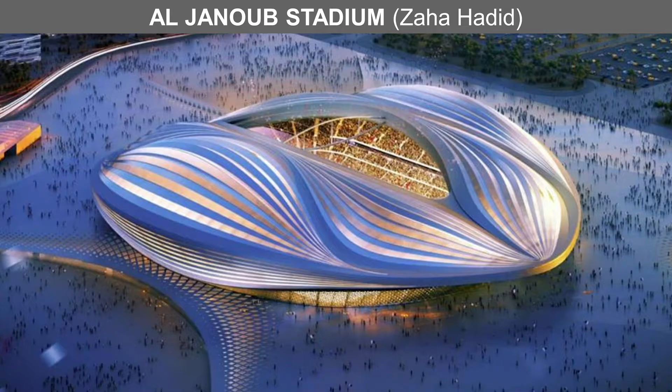Such as the recently inaugurated Al Janoub Stadium, designed by the late Zaha Hadid, which will be used for the upcoming 2022 Football World Cup in Qatar. Or another project in the Middle East, this time a 230 meters tall tower designed by the French superstar architect Jean Nouvel. Or this beautiful Mondrian hotel designed by the famous Dutch architect and designer Marcel Wanders.

So the key messages this webinar shall address are: why is acoustics important in the first place? In this introductory part, we shall discuss the fundamental benefits of acoustics. How to add value with acoustics: here, we'll capture the essence of the architectural work and look into acoustics not as a strictly technical discipline, but more as a tool which can be used to add value, both artistic and economic, to the project.

Of course, as the core business of us at Knauf Insulation is manufacturing mineral wool products, we shall address the role of mineral wool from the acoustics point of view, and we shall discuss the properties which are responsible for exceptional acoustic performance that mineral wool delivers.

Central part of the webinar will focus on the fundamentals of acoustic design and actual strategies which are utilized during the acoustic design process, and which will enable you to address any acoustic challenge you might face on your future projects. We shall also talk about the particular solutions that Knauf Insulation has in its portfolio for each particular application, and ultimately, we shall take a look into some common problems and challenges that inevitably arise during the course of the project.

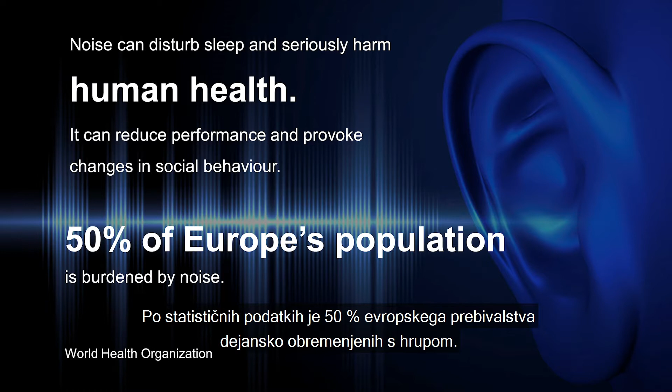According to statistical data, 50% of Europe's population is actually burdened by noise. In France, scientists went so far as to try to put a figure to the expenses provoked by various health-related problems, all triggered by noise. They came to this astonishing figure of 11.5 billion euros per year, which are lost due to employees being unable to go to work because of sleep deprivation or cardiovascular problems, all related to excessive noise and poor acoustic conditions.

And when unfortunate situations like these happen, the first place we all go are of course hospitals. Hospitals are very particular buildings which are expected to improve our health, that same health which might actually be worsened by noise. And now we can easily find ourselves caught with a very difficult problem: that noise-related issues are expected to be solved in institutions such as hospitals, which themselves could easily have problems with poor acoustics.

That is actually quite a common situation in hospital buildings worldwide. Here's a strong statement from the UK Department of Health on how important good acoustic design in hospitals is: good acoustic conditions improve patient privacy, dignity, and promote essential sleep patterns. Such conditions are key to healing.

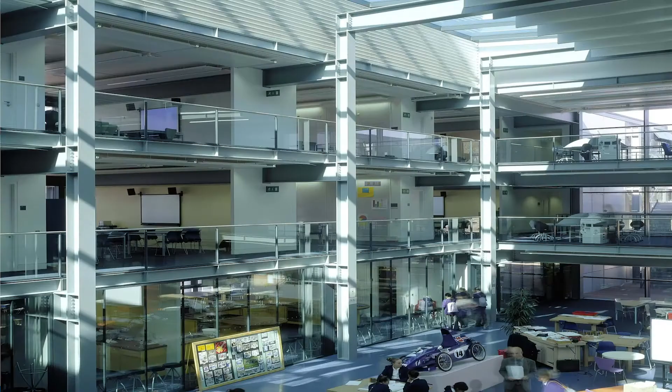In order to foster the open space approach and collaboration and communication between spaces, classrooms were designed without back walls, as you can notice in the image. By doing so, by removing the back walls, the classrooms were connected to this large interior atrium.

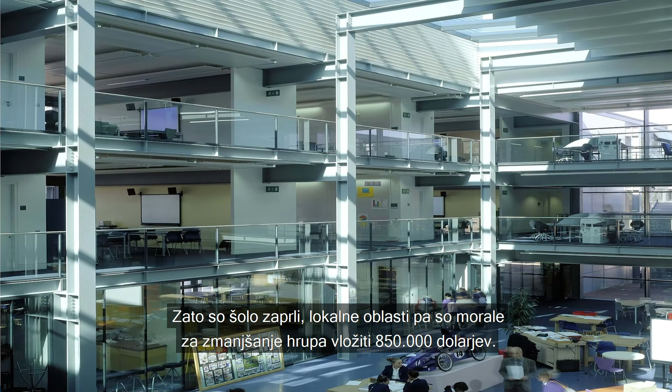So what actually happened on the very first day of school? The noise between the classrooms resonated so much through the atrium that students were not able to hear the lecture. And the outcome? The school had to be closed, and the local authority had to invest $850,000 on noise mitigating solutions.

These noise mitigating solutions were actually panes of glass that were installed at the classrooms' back walls. So today the classroom and the school look like this. All the classrooms are now enclosed, and that original idea of having open and connected spaces was actually abandoned.

So this is a very good example of how an idea which might sound really good at the early stages of a project can easily turn out to be very problematic from an acoustics point of view.

In the end, to summarize this introductory part of the webinar, we have mentioned a variety of positive aspects of acoustics which go beyond compliance with acoustic regulations. These include health aspects, comfort, functionality of the space, impact on productivity, as well as increase in profitability.

We also saw that acoustic design can be used as a powerful tool to increase the value of the property, and as a design feature which we can incorporate within the fabric of the architectural design. As a final thought, good acoustic design is important everywhere.

It's not only a privilege of opera halls, but it's also a very important aspect of residential buildings, schools, or even restaurants. Now that we know acoustics is important, let's take a look at the product we at Knauf Insulation are manufacturing, the mineral wool. This part of the webinar shall address the role of mineral wool from the acoustics perspective.

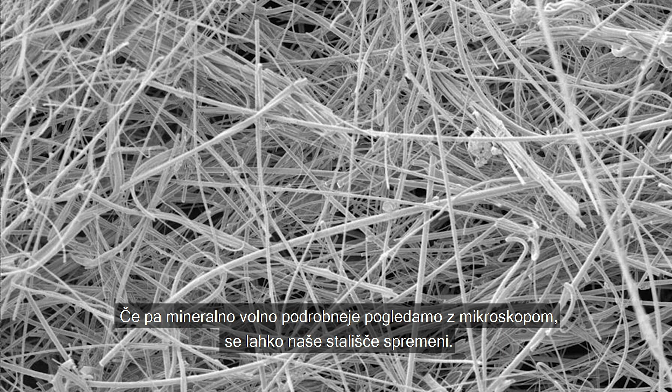However, let's take a closer look with the microscope, and we might find our perspective will change. So here's how the mineral wool looks under the microscope. To give you an idea of the scale, the diameter of these fibers is around 5 to 10 micrometers.

With this image in mind, we can already intuitively understand that sound will have a difficult task passing through this network of pores. While the sound is doing its best to move through this dense network of pores, a certain physical phenomenon happens, which we call the loss of acoustic energy.

This loss of acoustic energy is governed by many parameters, but the most important ones are fiber orientation, fiber size, the density of the entire insulation package, and of course the chemical composition. So something that didn't look so spectacular at first glance is actually a very sophisticated product with a lot of room for optimization of its performance.

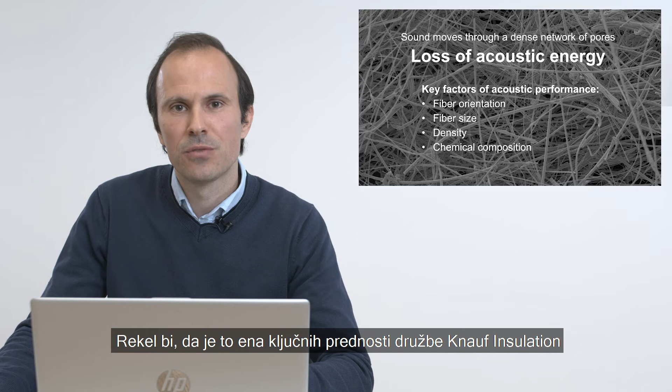You can easily imagine that acoustic properties will change if our fibers are thicker or thinner, or if the fibers are parallel or perpendicular to the sound. These are all parameters that our experts, scientists and acousticians at Knauf Insulation investigate with great attention. We do our best to optimize these parameters into a final insulation package suited for a particular application, and I'd say this is one of our key strengths at Knauf Insulation.

Our knowledge, our experience and our expertise, and the amount of effort we invest into the research and development of mineral wool, from the raw material, through the production line, to the final product which is packed and eventually delivered to you at the construction site.

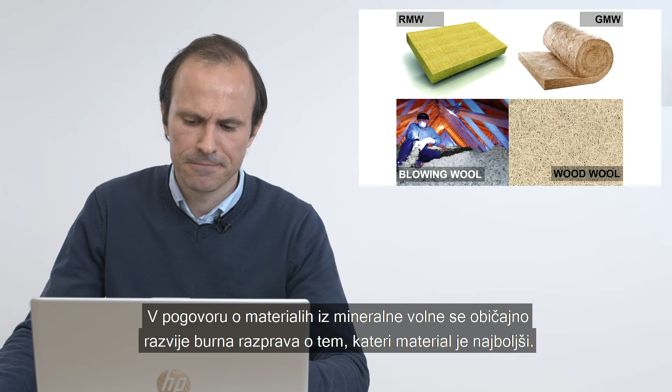When mineral wool materials are discussed, there is usually a strong debate around which material is the best. Is it wood wool? Is it glass mineral wool? Rock mineral wool? What I always like to point out and emphasize is that each of these materials has its own strong points, so it's up to the particular application to define which material will be best.

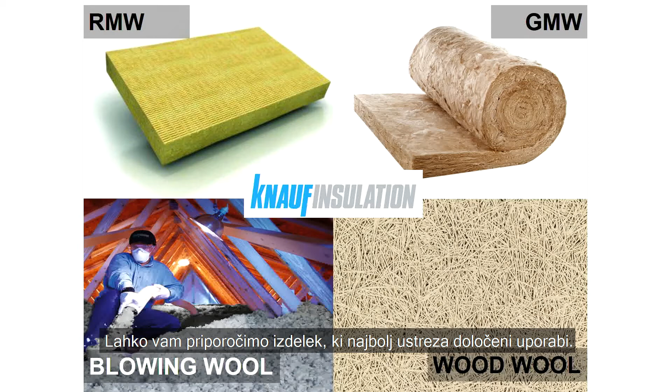That's again one of the strong points for us at Knauf Insulation, because we manufacture all these mineral wool products: blowing wool, wood wool, rock mineral wool, and glass mineral wool. So we are able to recommend a product which actually suits a certain application the best.

So what actually happens with the sound when it hits the surface of the mineral wool? Part of the incoming sound is reflected back to the space where it originally came from. Part of the sound is absorbed within the material, within that complex network of pores we saw, and the part which finds its way through the structure to the other side we call the transmitted sound.

These are the three main components which govern the acoustic performance of materials. The ratios and magnitudes of reflected, absorbed, and transmitted sound determine the material's acoustic properties and basically the possible use of a certain material for acoustic purposes.

Because of the porous structure of mineral wool, we say that the principal parameter of its acoustic performance is sound absorption. So what is sound absorption? There are a lot of mind-twisting definitions for sound absorption, and a lot of theoretical expressions to define it.

But I find a very convenient way to describe this property by looking at two opposite acoustical properties: sound reflection and sound absorption. Very intuitively, without deep theoretical knowledge, we can easily differentiate between materials which are more acoustically reflective and which are more acoustically absorptive.

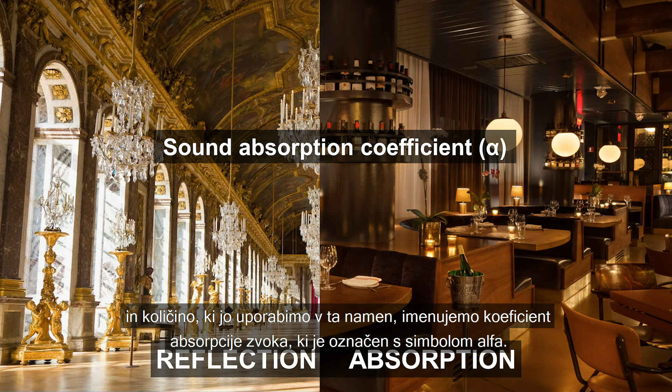And this ratio of reflected and absorbed sound is what we actually measure, and the quantity which we use for that purpose is called sound absorption coefficient. We indicate the sound absorption coefficient with the symbol alpha. As with every coefficient, this alpha can range only between 0 and 1. So for very reflective materials, we will have a sound absorption coefficient of 0, or a maximum value of 1 for very sound absorptive materials.

Typically, we like to say that the higher alpha value means the better acoustic performance. That is true, but we also saw that there are fine limits to what optimum acoustic performance means for different types of spaces. So yes, the higher alpha indeed means better acoustic performance, but the optimum value required will depend on the reasons behind the acoustic design.

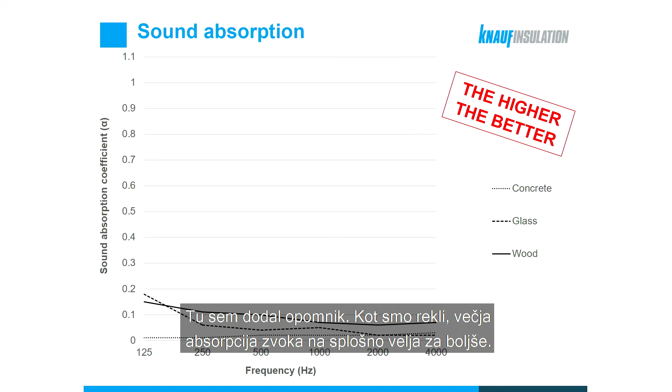Now we can take a look at some actual building materials and understand how to interpret a typical sound absorption chart. As a reminder, higher sound absorption is generally considered better. These are the results of standard sound absorption tests for three materials: concrete, glass, and wood. Before we go into the details, we do see that the values are rather low and closer to 0 than to 1. This is immediately indicative that this group of materials has low sound absorption.

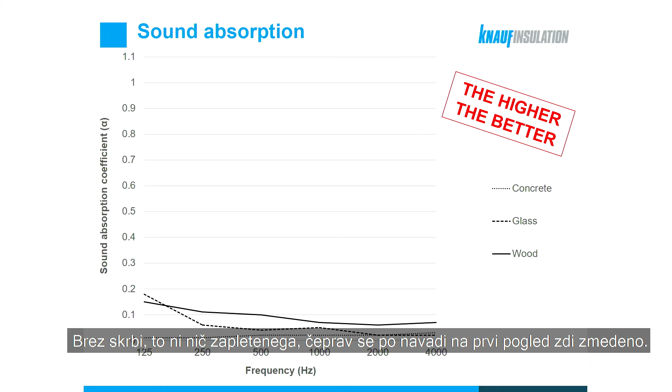On the left side of the chart is the sound absorption coefficient, ranging from 0 to 1. On the horizontal axis is the frequency range, so don't worry, this is nothing complicated, although it usually looks very confusing at first sight. To make things easier for everyone, we have developed a system to express the acoustic performance of materials as a single number.

That's very convenient, and makes our lives and coordination on projects much easier. However, sound is a phenomenon which occurs across a wide range of frequencies, and that's the reason why all acoustic tests are done on a large frequency range. In our example, we can notice relatively low sound absorption across the entire frequency range. Now, if we average these values using the single number convention, we could say that these three materials - concrete, glass, and wood - have a sound absorption coefficient, or alpha, of around 0.1.

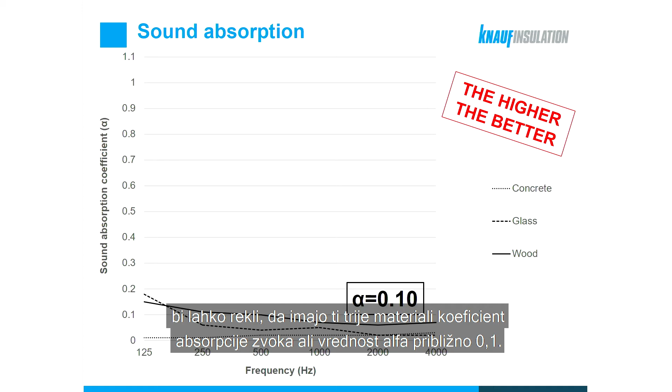Let's now add some materials to our chart - materials which we usually consider soft or acoustically absorptive. These are leather-covered seats, carpet, and heavy velour drapes.

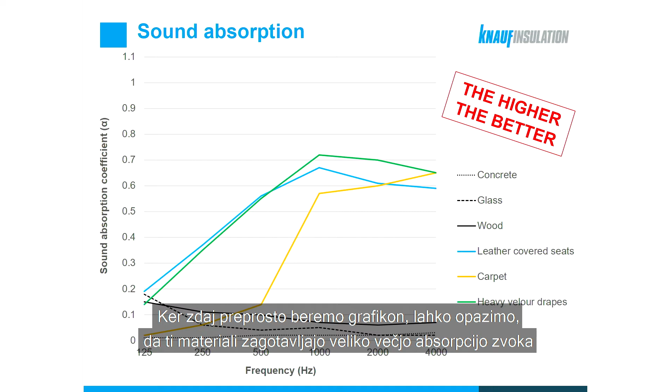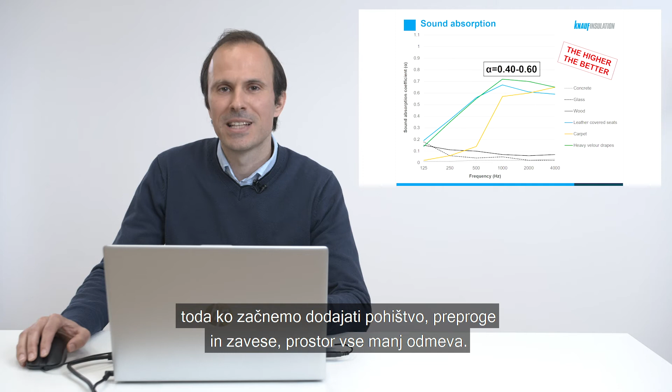Now that we can easily read the chart, we notice these materials provide much higher sound absorption, and using the single number convention, we can say these materials have a sound absorption coefficient alpha between 0.4 and 0.6. You can already imagine a simple example: an empty room which sounds very echoic, very reverberant. But as we add furniture, carpet and curtains, the room becomes less and less echoic. In a certain way, this is a real-life representation of this chart.

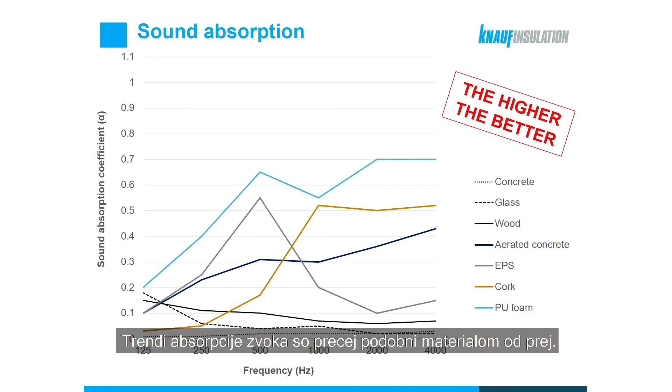Now, instead of these common materials used for interior decoration, let's look at some proper building materials such as aerated concrete, EPS, cork, or PU foam. The trends of sound absorption for these materials are very similar to the materials from before, and again we're talking about a range of sound absorption between 0.3 and 0.6.

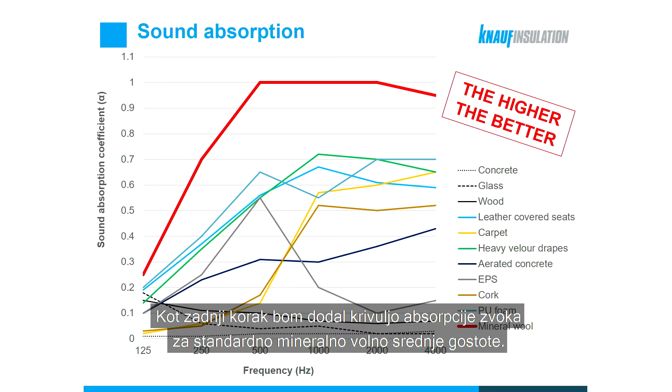Now, to make things very complicated, I'm going to add all these graphs to the same chart. And in the last step, I'll add the sound absorption curve for a standard mineral wool having medium density. Thanks to the open pore structure, it's evident that mineral wool has superior sound absorptive performance compared to these other materials, because those have a more closed structure of pores. Now we're reaching an alpha value, a sound absorption value, of around 0.9 to 1.

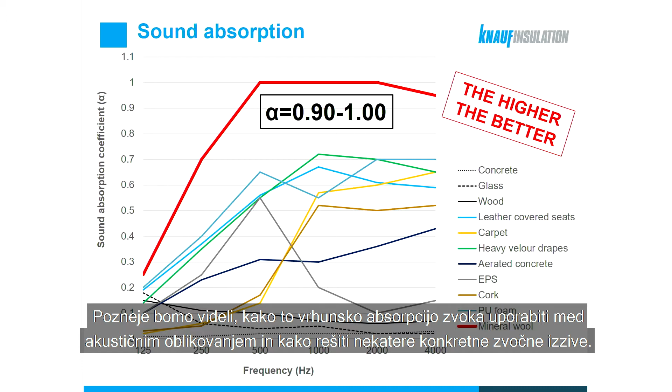Later on, we shall see how to utilize this superior sound absorption in acoustic design to solve some actual acoustic challenges. Just a note: all of these charts correspond to materials of similar thickness, around 30 to 50 millimeters, so the comparison of sound absorption between these materials makes sense in the first place.

Here are the key messages of this part of the webinar related to the role of mineral wool. Earlier, we saw the microstructure of mineral wool and the dense network of pores, which is actually responsible for its acoustic performance. We also mentioned several types of mineral wool: rock mineral wool, glass mineral wool, wood wool, and blowing wool. And we said that there is no single best product or best technology for all purposes.

The best product and the best technology will be determined by the specific requirement or application of interest, and we at Knauf Insulation manufacture all these types of insulation. Finally, we saw the excellent sound absorption properties that mineral wool has, and the advantage of an open cell structure compared to a closed cell structure.

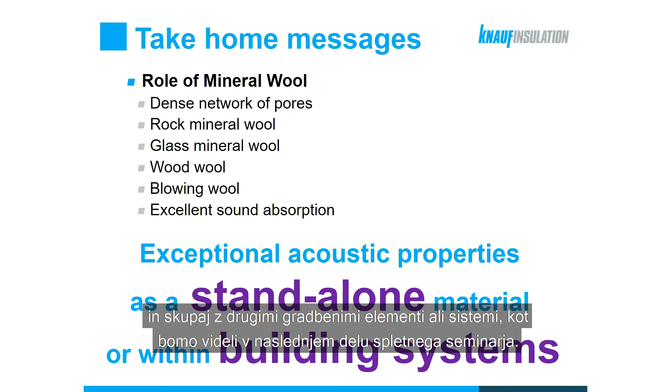In the end, we can say that mineral wool as a material has a very important role in acoustic design, both as a standalone material as well as within building elements or systems, as we are going to see in the next part of the webinar.

And here we are. After this initial, introductory part of the webinar, we are coming to the central part where we are going to talk about the fundamentals of acoustic design and the strategies on how to include acoustics in architectural design.

There are 5 fundamental aspects of acoustic design. For every single project in the world, no matter its type, size, or location, there are these 5 aspects we have to consider in order to address the entire acoustic design of a certain project. We can use this image of a very simple object to illustrate all 5 aspects.

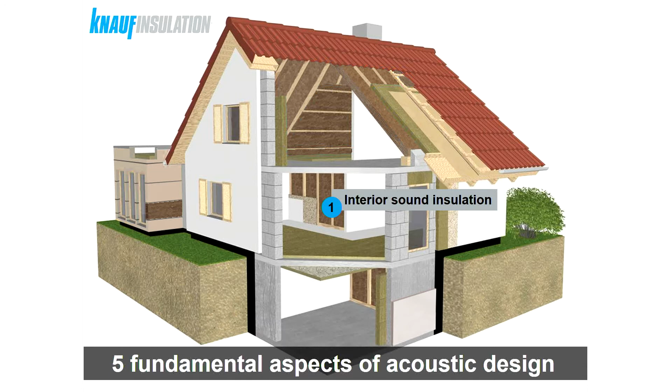The first fundamental aspect of acoustic design is maybe the one everyone is most familiar with: sound insulation between the interior spaces of the building itself. The second is room acoustics, which refers to the quality of sound within the space, similar to the acoustic ambient in the restaurant examples we discussed before.

The third is insulation from outdoor noise, basically the design of the building envelope to provide sufficient insulation from outdoor noise.

The next aspect is the noise of building services heard inside the building—typically air conditioning systems, ventilation systems, plumbing, elevators, and various items of equipment essential for the operation of the building. The last one is the impact from our building towards the environment.

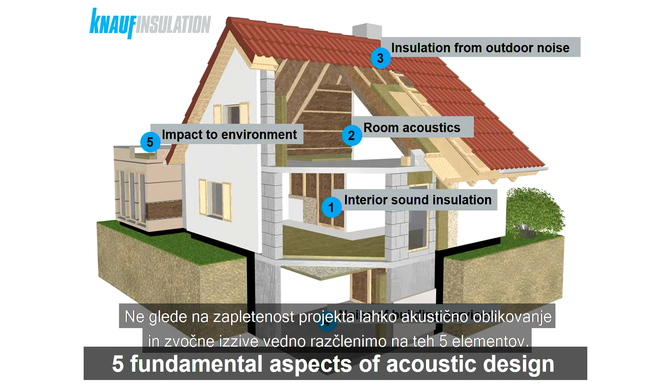This aspect deals with the acoustic treatment of equipment installed within our buildings, typically on the roofs. So no matter how complicated the project might seem, the acoustic design and challenges can always be broken down into these 5 fundamental aspects.

Let us start with the first fundamental aspect of acoustic design, the one that is maybe closest to everyone, that people usually have in mind when we talk about acoustics: interior sound insulation.

At the beginning, it's very important to define 2 principal mechanisms of sound propagation: airborne sound and impact sound. Airborne sound is the sound which travels through the air, such as the sound we hear when someone is singing or listening to the television.

On the other hand, there is impact sound, which travels through the structure—that would be the sound we hear when someone is walking on the floor above us.

When we talk about airborne sound and the ways to protect ourselves from it, to isolate ourselves from it, we use the term airborne sound insulation, denoted Rw. The higher this Rw is, the better it is.

To give you an idea what this means, we shall illustrate the subjective impression of privacy for some basic constructions. Let's imagine the person on one side of the wall is talking and we are listening on the other side, and the wall between us has a certain RW rating, a certain airborne sound insulation rating.

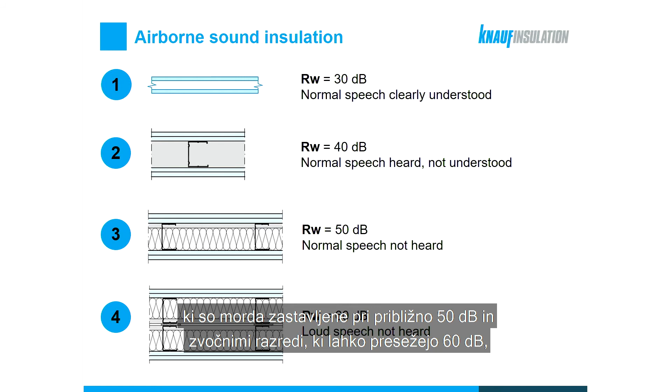However, this does not mean we will not hear the neighbors if they talk a bit louder or decide to play some music. So we would have to go further up, let's say to 60 decibels, to make a loud speech not heard. A wall construction providing 60 decibels could be, for example, a drywall with a double stud construction. You can see there are very fine limits between these ratings, and all of this is actually subjective, so it's not easy to make everyone happy all the time. This is exactly the difference between acoustic regulations, which stand around 50 decibels, and acoustic classes, which could go even above 60 for a luxurious acoustic class.

So to remind ourselves, the higher the airborne sound insulation, the better it is. The principal design strategy when we talk about airborne sound is the careful selection of constructions which have high airborne sound insulation. With impact sound, the situation is slightly different. Acoustic regulations will generally regulate the level of the impact sound. So just be careful: not impact sound insulation, but just impact sound. And for impact sound, the lower the value, the better it is.

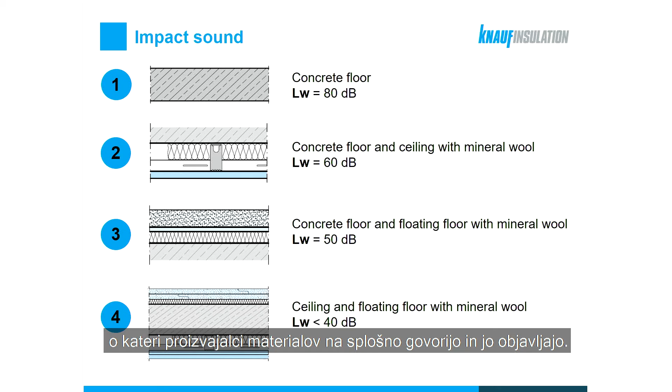So although it's the impact sound which is generally regulated, and we target the lowest possible figure for impact sound, it's actually another quantity which material manufacturers generally talk about and publish: the delta L value, which is the reduction of the impact sound. This is nothing more than the difference in impact sound between the concrete floor and the same concrete floor upgraded with a certain solution. For example, our floating floor has a delta L value of 30 decibels, and our ceiling solution has a delta value of 20 decibels. In this case, the higher the delta value, the better it is.

So impact sound and reduction in impact sound are two very similar things which usually cause a lot of confusion in the design. But what's very important to remember is: the lower the impact sound, the better it is; the higher the reduction in impact sound, the better. The principal design strategy will include selecting separating constructions of floors and ceilings having a high reduction in impact sound. When we talk about basic wall constructions where mineral wool is utilized, we generally have in mind these wall types.

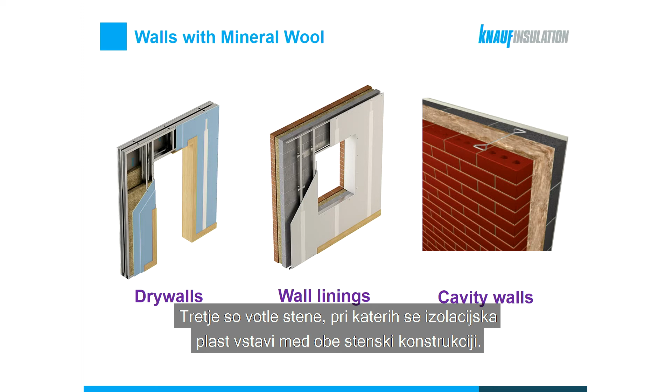But what is most interesting for us are the actual acoustic effects of mineral wool, the improvements that mineral wool brings to these constructions. One of the most often asked questions we face is about the actual difference in sound insulation of a certain construction with and without mineral wool. So let's address exactly that problem, and for the start, let's look into the effects that mineral wool has in classical drywall systems.

For example, the part of this wall on the image has a mineral wool layer in the air cavity, and a small part has nothing between the steel elements. So the very legitimate question we can pose is: what is the difference in sound insulation between such two constructions?

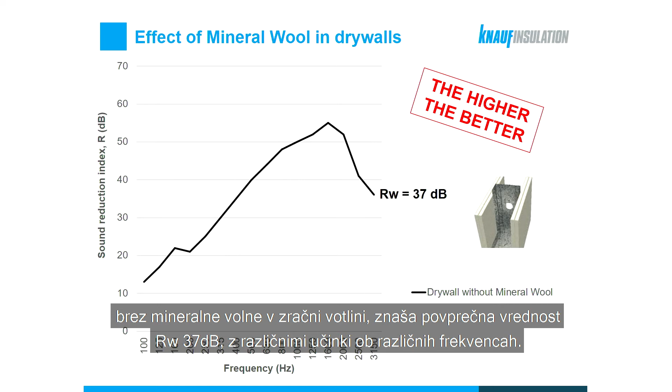Here is the Airborne Sound Insulation graph, with a reminder that the higher sound insulation value, or the higher RW value, means the more favorable acoustic result, or actually the better privacy between two spaces. So for this standard 100 mm dry wall, which has two standard 12.5 mm thick gypsum boards on each side of the wall and no mineral wool in the cavity, we expect an average value of RW of 37 decibels, with different performance across different frequencies.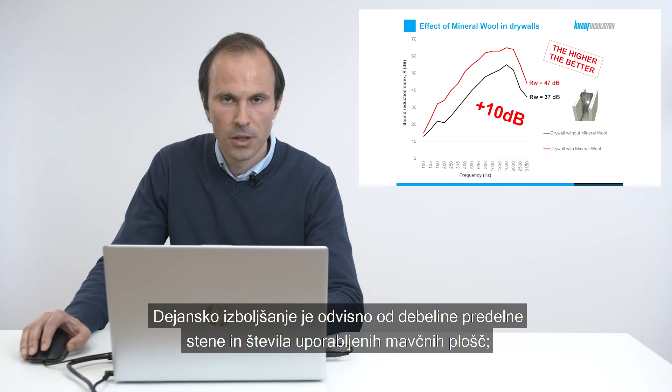But please have in mind that this 10 dB increase is not a fixed value that is valid for every single wall structure. The actual improvement will depend on the thickness of the partition or the number of gypsum boards utilized. But generally, yes, there will always be an increase in the airborne sound insulation with adding the mineral wool.

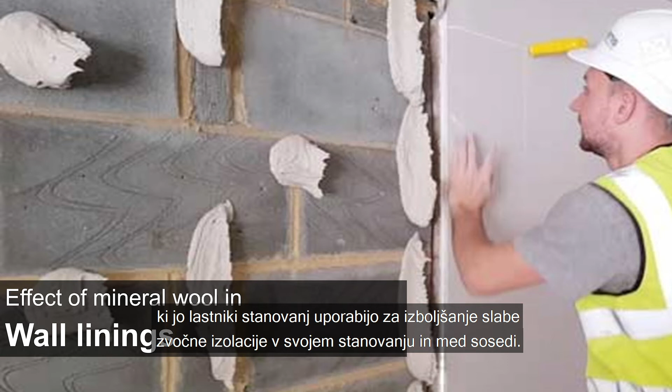When we talk about sound insulation, wall linings are also a very interesting subject, because this is the strategy which homeowners utilize to increase the poor sound insulation between themselves and noisy neighbors. And what we see as a very common technique is a direct fixation of the gypsum board to the main wall, as given in the image, without any insulating layer.

So let us then compare the sound insulation for two wall upgrades. First one, done without insulation, so with a direct adhesion of the gypsum board to the basic wall, achieves an RW value of 53 decibels. And the other solution, which includes a mineral wool layer between the same basic wall and the gypsum board, achieves 61 decibels. So the benefit of utilizing mineral wool is quite evident in the entire frequency range, and finally brings an additional 8 dB increase in sound insulation.

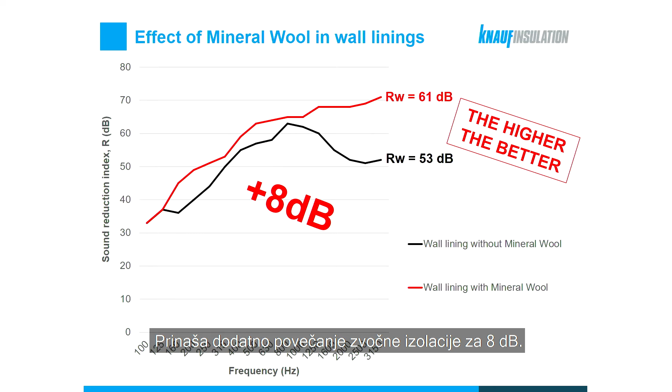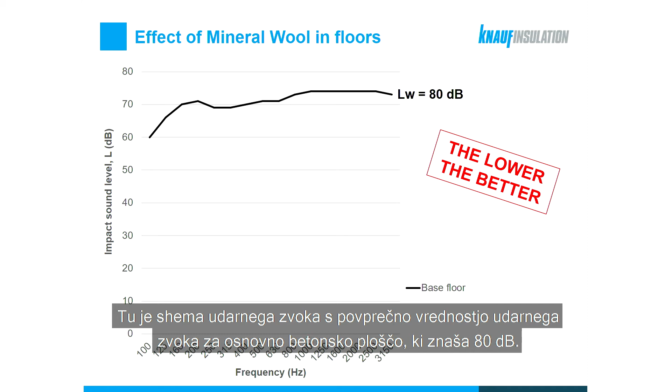Now let's move from the walls to the floors. We shall do the comparison against the basic floor structure, and in our case it's a simple 140 mm thick concrete floor. We shall compare acoustic performance, the impact sound insulation in this example, with the same floor construction, which has a few additional layers: an insulating layer of 30 mm Knauf insulation mineral wool, and the floor finish, which can be cement screed, parquet, or just ceramic tiles. Here is how the impact sound insulation chart looks, with the average value of impact sound for the basic concrete slab amounting to 80 dB.

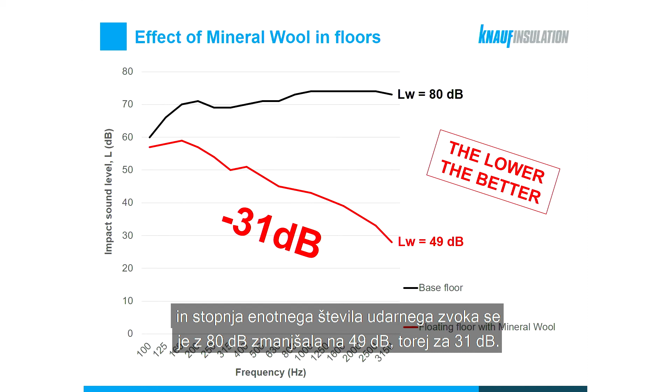Please remember that this chart displays the impact sound, so not sound insulation. Therefore, as we said, the lower the value, the better it is. Here's what happened with the impact sound when we add the floating floor with mineral wool on top of that basic concrete floor. The reduction of the impact noise is evident across the entire frequency range, and the single number rating of impact sound has been reduced from 80 to 49 decibels, so a 31 dB reduction in impact sound.

A 45 mm Knauf insulation mineral wool is added below the basic 140 mm concrete floor, and the ceiling is closed with a single board of standard 12.5 mm gypsum.

And here is the comparison of impact sound level for these two constructions, before and after the installation of the ceiling with the mineral wool. There is a 23 decibel reduction in impact sound, from 81 decibels for a basic concrete floor down to 58 decibels for a concrete floor with the suspended ceiling. So a delta L value of 23 decibels.

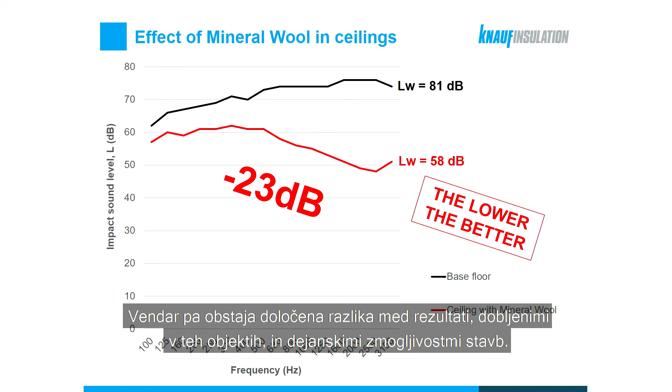So all these examples that we have just seen come from actual acoustic tests undertaken in standardized acoustic facilities, basically in acoustic laboratories. However, there is a difference between the results obtained in these facilities and the real-life performance in buildings.

This difference in acoustic performance between the acoustic laboratory and the construction site is often the cause of problems and disappointment with poor acoustic insulation from the homeowner's side.

This is a very complex subject, but to simplify it, I like to use the analogy of fuel consumption, because fuel consumption is something much closer to our hearts and our pockets, and all of us visit petrol stations much more often than acoustic laboratories.

So how does fuel consumption work? When we buy the car, the manufacturer declares an average fuel consumption, and this consumption has been very precisely measured following a very strict test methodology. This declared fuel consumption corresponds to acoustic performance measured in the laboratory, with indicators for airborne or impact sound insulation, on the right side of our fuel indicator.

Let's say when we have a full tank - we call this the nominal acoustic performance.

On the other hand, we bought the car, now we're starting to drive it, and we immediately notice that we consume more petrol than declared by the manufacturer. In the real world, this is something we all accept as more or less normal, and we do not take the manufacturer to court because of that. We understand that the standard fuel consumption test assumes constant speed, while we usually drive a bit slower or faster. That's actually what happens with acoustic performance at the construction site.

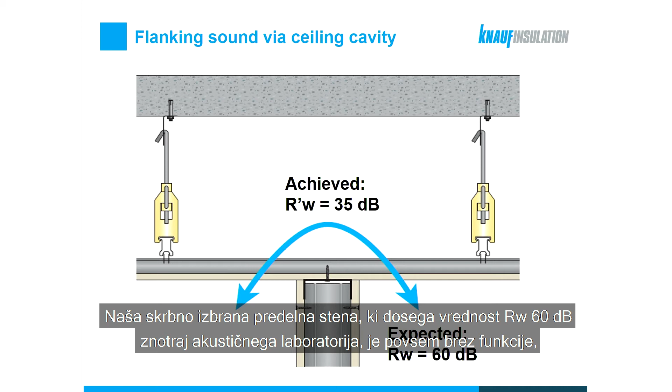Because all the sound goes above the partition, through the lightweight ceiling, or actually maybe even a perforated ceiling, the sound reaches the other room with an actual R-W of 35 decibels. So we have a 25 decibel lower acoustic performance than we expected. A disaster. And there are no limits to the possibilities for flanking sound transmission.

Flanking sound can also happen because of the penetration of services. In this particular case, the architect was actually very knowledgeable, and extended the partition above the ceiling level to overcome that first problem.

But the team in charge of running these services above the ceiling level was not on the same page, and to make their lives easier, they opened a considerable part of the wall to install the services. Again, the nominal sound insulating performance was degraded and the level of privacy was not satisfactory for the end user. Sometimes such problems occur just because of an internet cable which had to be additionally installed. So a small cable, a big hole, and a big acoustic problem.

You can imagine the disappointment of these people when they realized their internet was now much faster, but the level of privacy was seriously degraded. Details of construction, which might seem of low importance, can also play a big part in the story of acoustic design.

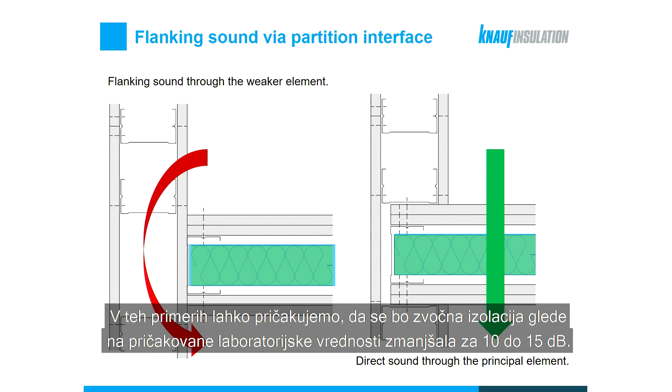Although these walls have been selected with an insulating layer and an extra gypsum board to provide a good level of sound insulation, in real life we will again face problems because the sound will go around the partition, not through it. We will again face degradation of the nominal acoustic performance. In such an example, we could expect a 10 to 15 dB reduction in sound insulation from the expected laboratory value, compared to an example where there is no degradation because the principal wall element was not interrupted. We could go on with similar cases from practice, but for the moment let's close this chapter and repeat the important messages.

There are two principal mechanisms of sound transfer and sound insulation: airborne sound and impact sound. Mineral wool is an important part of building elements whenever acoustic performance is important. We should be very careful when detailing our design about the traps that flanking sound transmission can bring. And most important of all, which we have illustrated in several examples, is that mineral wool increases the sound insulating performance of building elements. So there is an actual difference in sound insulation with solutions with and without mineral wool.

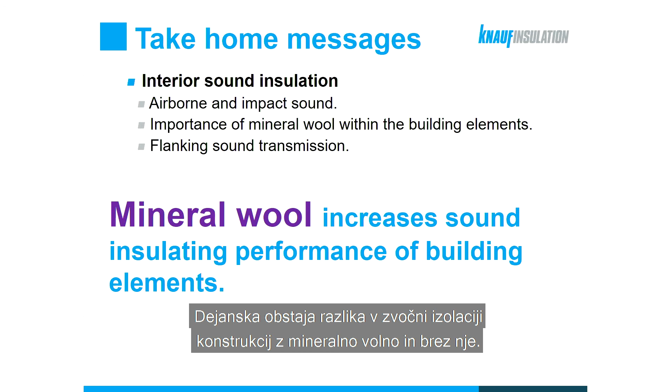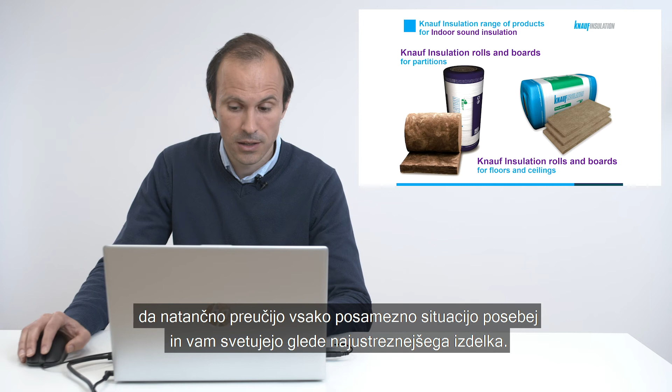The range of Knauf Insulation products suitable for indoor sound applications includes Knauf Insulation rolls and boards for partitions, as well as rolls and boards for floors and ceilings. I emphasize that our technical teams at Knauf Insulation are always at your disposal to carefully study each particular situation separately and advise you on the most suitable product for your particular project.

The second part of the webinar is in a certain way different from the previous one. That first aspect focused on isolation from unwanted sound. But in this part, we shall focus on room acoustics, so on the quality of sound within the space. To define what we mean by the quality of sound, first we need to understand what happens with sound within a space.

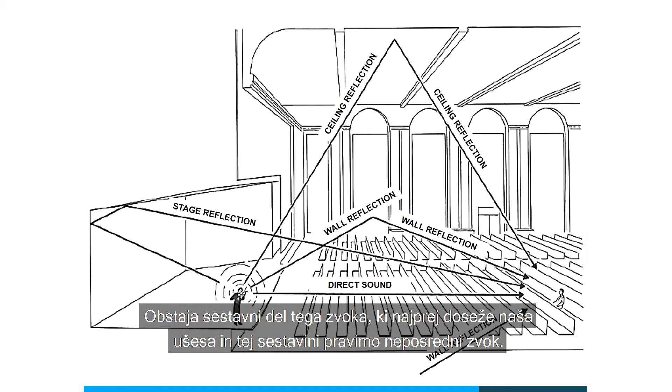What happens with sound when someone says a word or plays a note on the violin? When a violin player plays a tone, sound travels in every possible direction—forwards, backwards, up and down. There is a component of this sound which comes to our ears first, and this is called the direct sound. This is the sound which traveled the shortest possible distance from the source, from the violin in our case, to the listener, without any interaction with other surfaces.

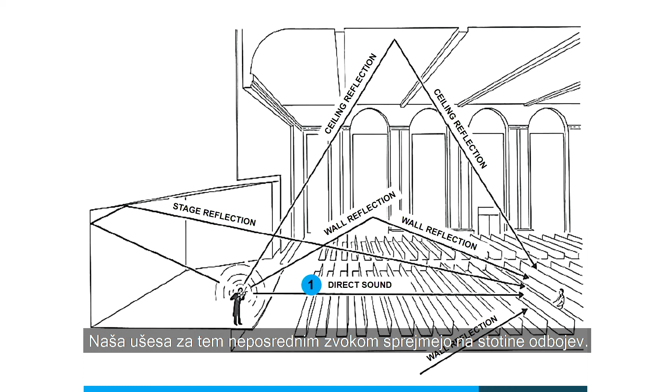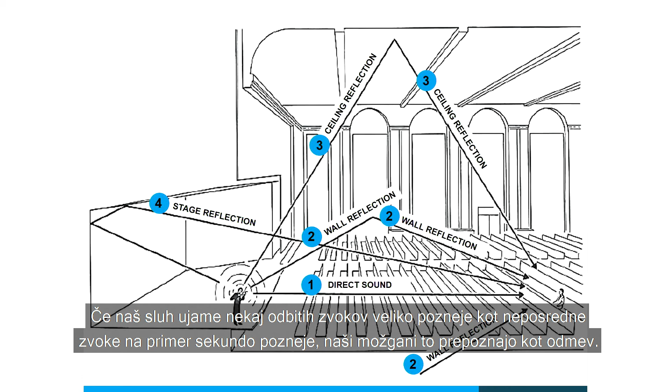In a very rapid succession after this direct sound, our ears receive hundreds of reflections—some from the walls, some from the ceiling and the stage, some from the floor and the seats. The synchronization of all these components defines the quality of the sound that we perceive as listeners. If our ears catch some reflected sounds much later than the direct sound, for example 1 second later, our brain will recognize this as echo. But if these reflected sounds arrive very quickly after the direct sound, within a few milliseconds, our brain will have trouble recognizing what was the direct sound and what was the reflected sound.

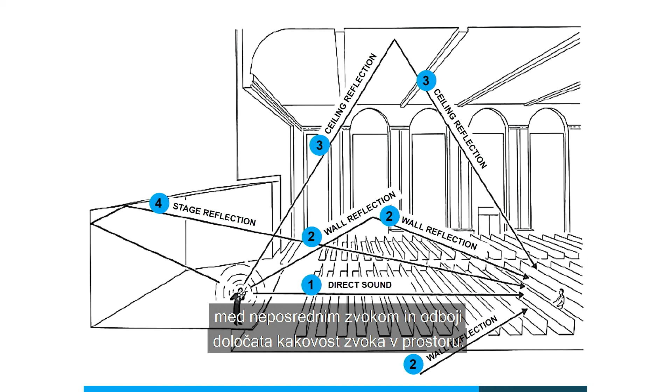Our brain will recognize it as a very rich sound and appreciate this very strong acoustic sensation. So very generally, we can say that this permanence of sound within the space, and this very fine balance between the direct sound and the reflected sound, defines the quality of sound within a space. This permanence of sound within the space is what we call the reverberation time, measured in seconds, and it's usually considered one of the main parameters which defines the acoustic quality of a certain space.

Now, a very good question is, what is the best, what's the optimum reverberation time for a certain space? Well, I have to disappoint you, there is no straightforward answer to this question. There are certain types of spaces where short reverberation time is preferred.

So when I say short, I mean reverberation time below 1 second. These are typically spaces such as offices, meeting rooms or classrooms, where it is the spoken content which is predominant, so our main intention is to make the spoken content understandable. On the other hand, in spaces where music is of importance, we benefit from a longer reverberation time, usually exceeding 1 second. Opera lovers, for example, will appreciate a reverberation time of 1.5 seconds, and it is said that Mozart might sound best with a reverberation time of 2 seconds or more. So you can see there is a very fine and fragile limit between these values.

Actually, that's the beauty of acoustics, because there is no strict rule for what is good and what is bad. But our general idea and our target is to make the speech intelligible and to make the music strong and clear. And we use reverberation time as the convenient way to express and quantify that.

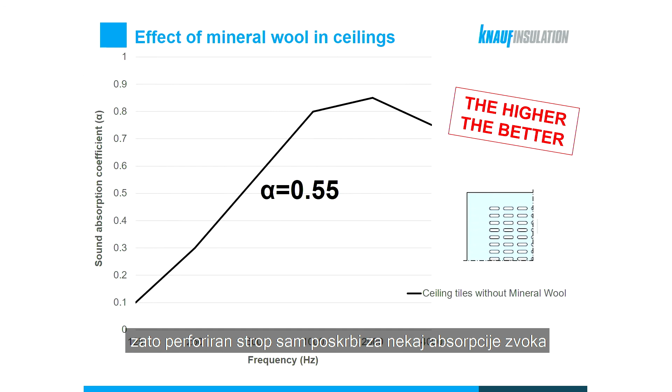This again is the sound absorption chart for a classical perforated ceiling tile system. This system by itself already has a decent sound absorbing property. If we put an average alpha value on this chart, we could say it's roughly around 0.55. In this case, we can say that because of the perforations, some of the sound is trapped in the ceiling cavity, and that's why the perforated ceiling provides some sound absorption by itself, unlike a standard gypsum ceiling, which would have a negligible sound absorption, most likely an alpha value close to 0.

After adding mineral wool insulation on top of the ceiling, here is what happens with the sound absorption: we have an increase across all frequencies, with an average increase from 0.55 to 0.9 of the sound absorption coefficient. These things look very straightforward, but they're often confusing.

It's not so easy to talk in terms of alpha coefficients or reverberation times, because even for professionals, it's not easy to imagine how a certain space would sound, even if we know the size of the space, or even if we know the characteristics of every single material we plan to utilize in this space.

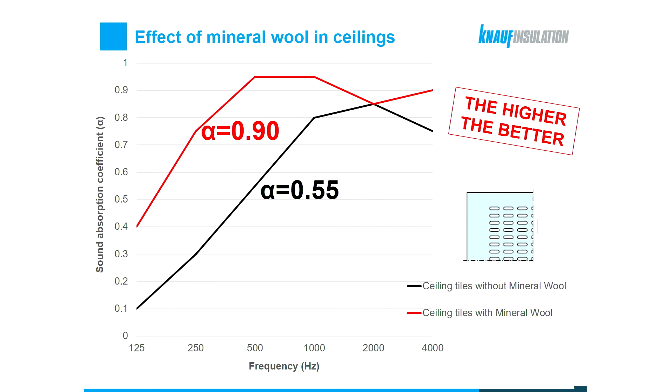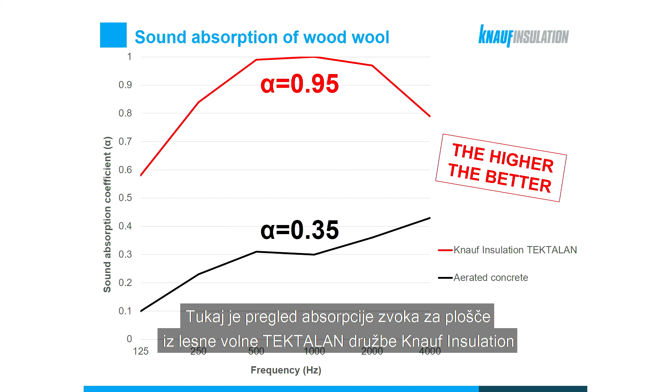Here is a sound absorption chart for a wood wool board, Tektalan by Knauf Insulation, compared to aerated concrete of the same thickness. There is quite a difference between the two across the entire frequency range, and a difference of 0.6 in the average alpha value—from 0.35 for aerated concrete to 0.95 for Tektalan, the wood wool.

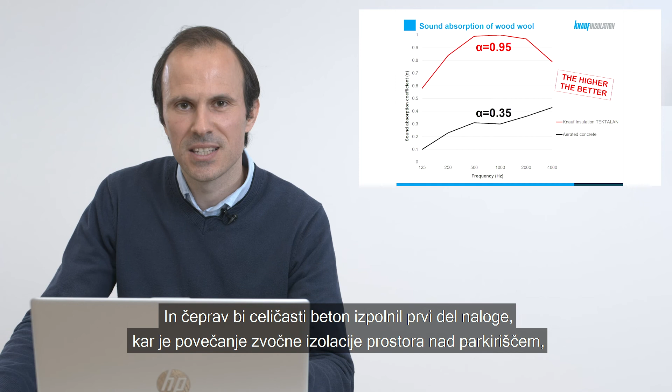Similar to wood wool, aerated concrete is also used for the ceilings of parkings. Aerated concrete would fulfill the first part of the acoustic task, to increase sound insulation to the space above the parking. However, its low sound absorptive capacity would make the parking a very echoic space, and you would struggle to understand what has been said through the public address system.

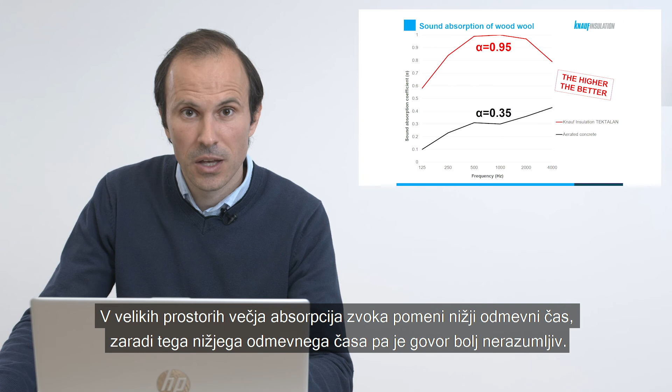So for such large spaces, more sound absorption will lead to a lower reverberation time, and this lower reverberation time will lead to higher speech intelligibility.

We have discussed some strategies on how to control the reverberation time and presented unlimited design options. And finally, we've mentioned the importance of speech intelligibility in large public spaces and the advantages that wood wool solutions can offer in such applications.

So what to capture is that mineral wool adds additional sound absorption to the space and aids in reducing reverberation time. There are numerous products in the range of Knauf Insulation which can be utilized for reverberation time control, such as the wood wool boards suitable for exposed ceilings, especially underground parkings, or the classical insulation rolls and boards used for ceilings and walls.

But let's now move from the interior of the building to the building envelope, and let's talk about the third aspect of acoustic design: insulation from outdoor noise.

Some of us are very lucky to live in isolated and remote individual houses, and for such objects, outdoor noise is actually not even an issue. But apart from those few very lucky individuals, the world is becoming more and more densely populated.

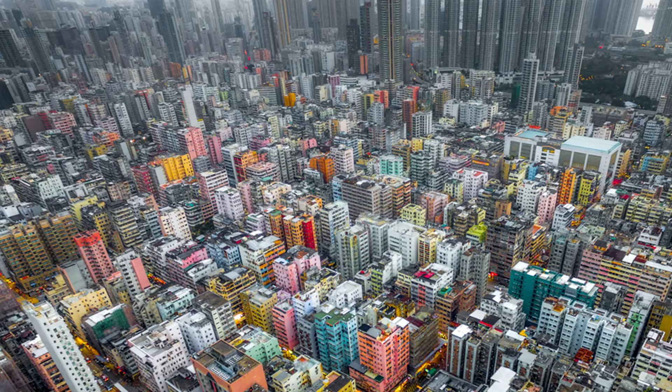So there are more and more people on the planet, and more people are moving to the cities. So we could generally say that our future has a more urban than rural perspective. And this is how this urban perspective looks like in Hong Kong.

This is maybe a bit of an over-exaggerated example, but a good example to imagine the levels of noise which might be present in such a dense urban environment.

Typical sources of outdoor noise are traffic, which can include road noise, trains or aircraft, then various building services, which are often installed on the roofs of neighboring buildings. Outdoor noise can also be emitted from industrial sites and production facilities, which quite often cause problems to residential areas, or even entertainment noise, such as noise related to sports events, stadium rock concerts, various outdoor events, or simple nightclubs.

To give you an idea about the magnitude of noise in a typical urban environment, which usually consists of a mix of traffic sounds, human conversation, and some building services noise, that typically amounts to 65 to 70 decibels.

On the opposite end of this scale is something we can consider a comfortable interior level, and this ranges between 30 and 40 decibels. Let's say 30 decibels would be quite a good level for a bedroom, and 40 decibels would be a comfortable level for a working space or an office.

Our first weapon as designers, our design strategy against outdoor noise, is the so-called shielding of noise-sensitive areas. Noise-sensitive areas would be rooms such as bedrooms, hotel rooms, maybe libraries, and similar spaces where rest or concentration is important.

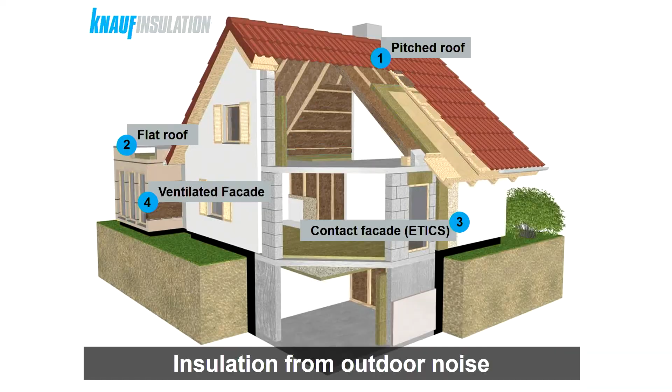Here's a quick and simple illustration of the standard facade elements. So our first line of defense against noise from outdoors is the pitched roof, flat roof, contact facade or the ETICS system, and ventilated facade.

So what are the effects that mineral wool has in a facade system? Let us look into the external wall, which is usually our first line of defense. For example, we have a concrete wall as our basic wall construction.

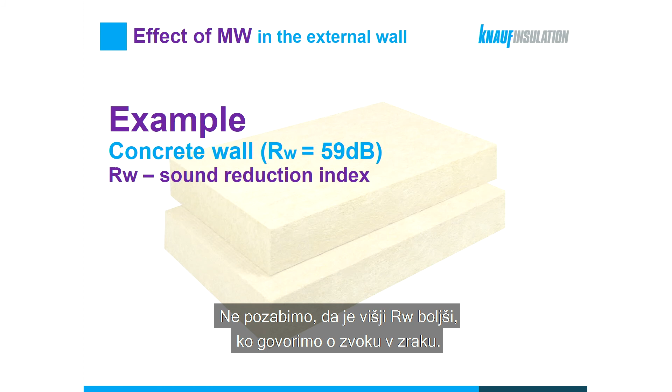The sound insulation, the RW, of such a wall amounts to 59 decibels. Let's not forget that the higher the RW, the better, when we are discussing the matters of airborne sound insulation. Noise from outdoors falls into the category of airborne sound insulation.

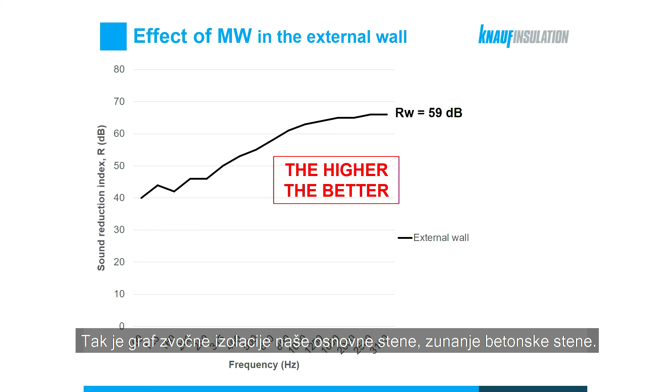So this is how the sound insulation graph of our base wall, the external concrete wall, looks like, with the RW value of 59 decibels.

If we add the facade system, the ETICS system with mineral wool, to the external wall, we will provide an increase in airborne sound insulation - an increase in RW value of 11 decibels, from 59 to 70.

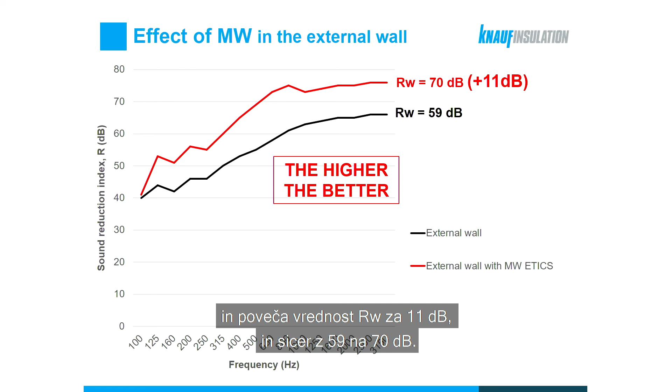And this reduction in the lower frequency matches the frequency of the hum that traffic noise usually produces. So eventually, instead of increasing the sound insulation of the external wall, which would be intuitive because we are adding extra layers of insulation, we actually reduce the sound insulation of the external wall - and we reduce it exactly in that frequency where traffic noise is usually most predominant and most annoying.

This particular effect of reducing the acoustic performance of the basic wall is directly related to the rigidity of the insulating layer.

This example outlines the difference between insulation such as mineral wool, which has a more open pore structure, and polystyrene, which is generally more rigid and has a more closed pore structure. We could imagine a large variety of materials which would fit between these two curves. Some materials could increase and others could decrease the sound insulation of the basic wall. So again, there is no single best material for every purpose, rather there are materials which are most suitable for a certain application.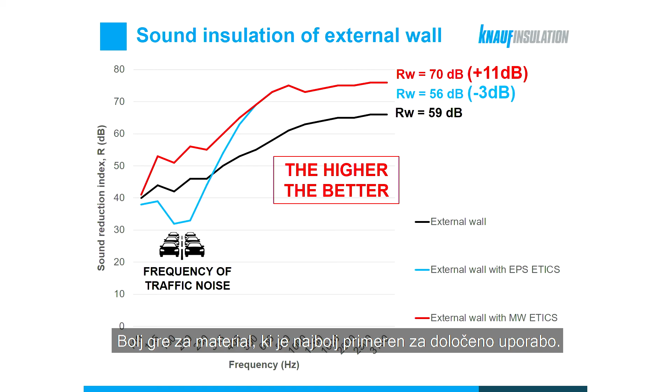Here is another example of the effects of mineral wool in facades, this time illustrated on a wooden structure, which is becoming very attractive these days because of its appearance, the green building story, and energy efficiency. In this case, our basic wall is a cross-laminated solid wood structure with an RW value of 34 decibels.

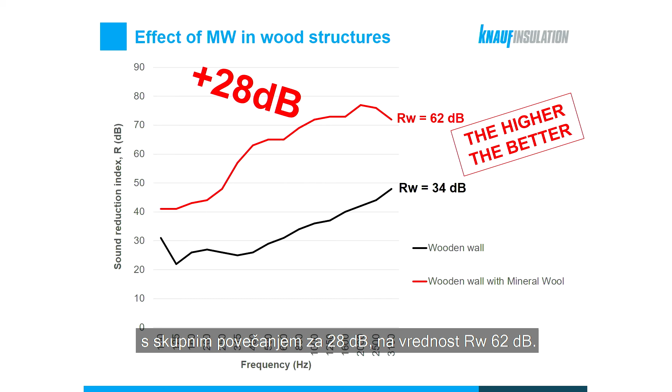If we plot this wall on the sound insulation chart, here is how the curve of 34 decibels looks. We can again see that addition of the insulating layer causes the sound insulation to rise across the entire frequency range, with an overall increase of 28 decibels, from an RW value of 34 for the basic wall to an RW value of 62 decibels for the insulated basic wall.

For the very end of this fundamental aspect of acoustic design, outdoor noise, one particular aspect which does not often cross our minds when we start the design process is rain noise. Rain noise is most prominent on metal deck roofs. This aspect is even regulated in some countries, but regardless, rain noise can be quite annoying if you happen to live in the attic, just below the metal deck roof.

These kinds of constructions are these days very popular for schools and even multi-purpose halls. So you can imagine it would not be easy to listen to a lecture in a classroom or to a classical music concert in a multi-purpose hall if it happens to be a very rainy day. Rain noise may not be on our minds as designers quite often, but we still take it seriously, and we do perform acoustic tests to measure its impact.

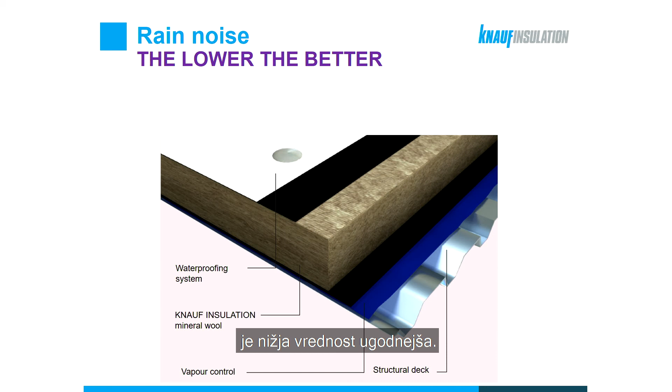In one recent study, rain noise on two roofs was compared. As we're talking about noise level, the lower value is more favorable. A typical metal construction insulated with Knauf Insulation mineral wool yielded a result of 35 decibels once exposed to rain. The rain noise for a similar roof construction, but using foam as the insulating layer, produced 60 decibels in the space below the roof.

So that's 25 decibels more noise compared to the roof with a mineral wool solution. Again, it's the porous structure of the mineral wool that is the principal reason for the improved acoustic performance, even in this very particular application. And in the end, to summarize what we've learned about insulation from outdoor noise.

Typical outdoor noise levels are in the range of 65 to 70 decibels in standard urban areas. Comfortable interior noise levels range somewhere between 30 and 40 decibels, and the building envelope is the element that presents the barrier between outdoor noise level and indoor level of acoustic comfort.

With several real-life examples and actual constructions, we have outlined that the correct selection of insulating layer increases sound insulation of a facade system or even reduces the level of rain noise. But on the other hand, we also saw that an unfortunate selection of insulating material can sometimes lead to a reduction of sound insulation.

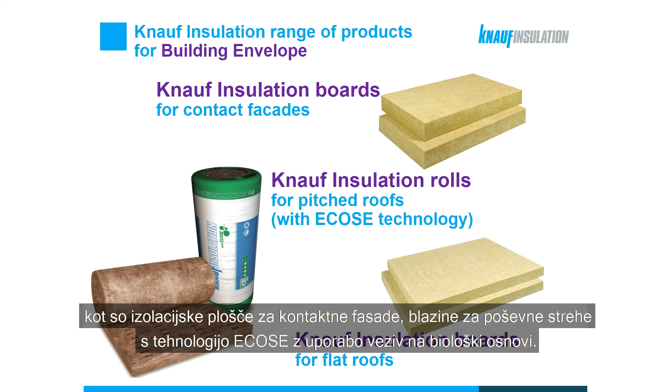At Knauf Insulation, we provide a wide range of products suitable for all facade elements, such as insulating boards for contact facades, rolls for pitched roofs with our ECOSE technology using a bio-based binder, or boards for flat roofs. Most important, we have the knowledge and experience to advise you on the optimum solution for each particular facade type, depending on the requirements and ideas behind every individual project.

Part 4, the fourth fundamental aspect of acoustic design: noise of building services.

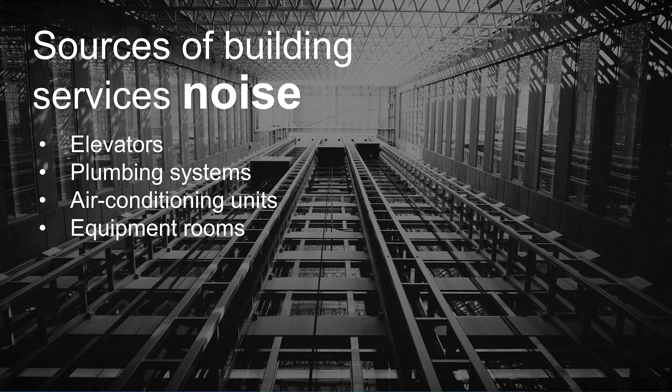There are numerous types of building services, and eventually in real life we can even experience noise with the simple buzz of a light bulb. But generally, there are certain building services which are considered the main sources of noise and potential problems. These are typically elevators, plumbing systems, air conditioning units, or complete equipment rooms, which can house anything from central climatization systems to swimming pool pumps.

I'll start with elevator noise, as I've personally lived in a lot of buildings and spent nights in many hotels where I could hear every single stop and start of the elevator. So the principal design strategy is to separate the elevator shaft wall from the noise sensitive area. If we are limited with options and can't escape these situations, the correct acoustic strategy is to structurally disconnect the common wall between the room and the elevator shaft.

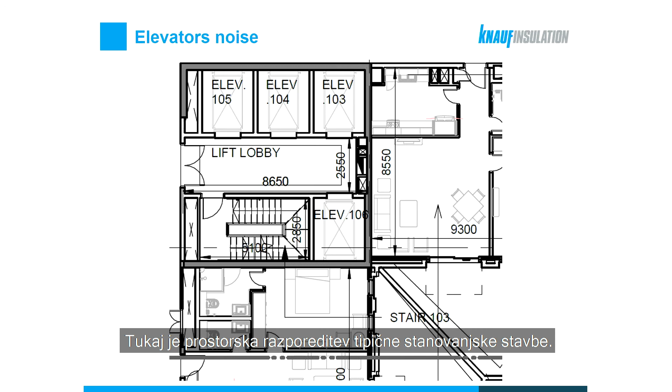A very similar problem happens in the case of equipment rooms located next to residential areas. Here is a layout for one typical residential building. We can notice the central core, which houses 4 elevators and the staircase, with residential spaces located around the core.

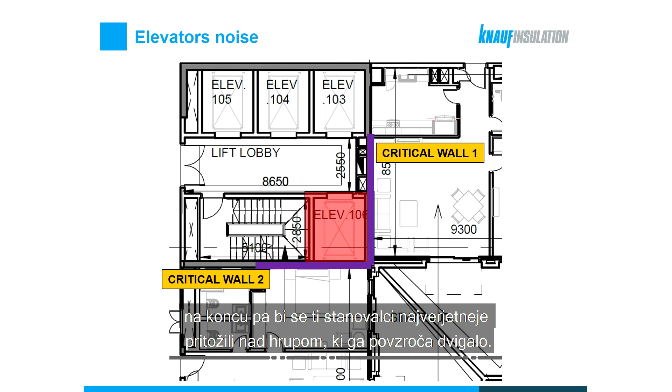These upper 3 elevators are very favorably located, next to the corridor and the utility space to the right. But this 4th elevator looks like a problem because it shares a wall with the living room and the bedroom of 2 neighboring apartments. This is something which can pass relatively unnoticed during the design stage, but once this building opens, the tenants would most likely complain about the noise coming from this elevator.

So how do we solve such a problem? Generally, we classify this as a wall lining or wall upgrade challenge, but with the important detail of structural disconnection between this wall lining and the elevator shaft. Such disconnection can be achieved with special brackets, or by connecting a support steel structure to the floor and ceiling alone, with a mandatory insulation layer of mineral wool and additional wall boards.

This upgrade will certainly reduce the problem, but there is still a path for noise transfer through the connection of the elevator to the floor slabs. These particular details are very difficult to solve during renovation. Although, yes, we could introduce a secondary ceiling, a floating floor, and achieve much better insulation, better solutions can be done in the early design stages.

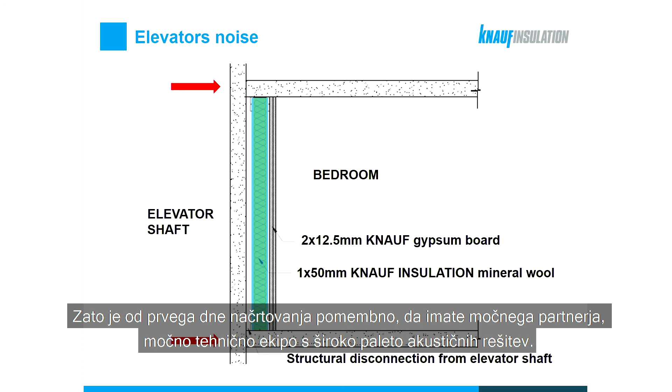That's a very important message: acoustic solutions are much easier to implement and much cheaper if they are considered in the early design stages. That's why it's important for every architect to have a strong partner, a strong technical team with a wide range of acoustic solutions from day one of your design process.

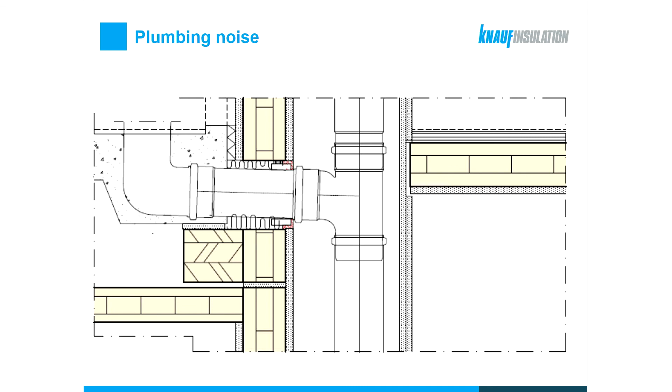Another usual problem with building systems is plumbing noise, usually related to water supply and drainage systems. The most simple case would involve us hearing the neighbors when they take a shower or flush the toilet. In this illustration, we can see the benefit of structural decoupling with mineral wool, which prevents the water flow from being transmitted to the pipe and from the pipe to the entire building structure, in case we had a rigid fixation without this mineral wool strip. Plumbing sound could then easily travel up and down the building, even through several floors.

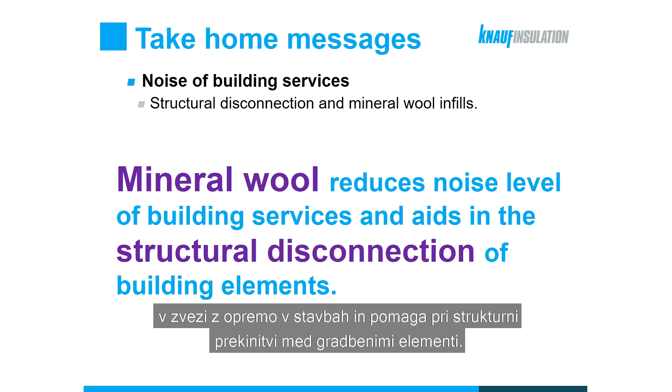To summarize this part on noise from building services, we have highlighted the importance of structural disconnection and mineral wool infills. Owing to its porous structure, mineral wool is highly effective in reducing noise levels of building services, as well as aiding in the structural disconnection of building elements. Knauf insulation products suitable for these applications are Thermo-teK and Power-teK rolls and boards, great for applications where space constraint is an issue. They are also suitable for application around pipework and ventilation channels, as well as our traditional Knauf insulation rolls and boards for partitions, basically for wall linings and wall upgrades.

Typical sources of noise which cause impact to the environment are air conditioning units and various items of mechanical equipment. This can be from pumps to heat exchangers, exhaust fans, and usually these are located in equipment rooms, which will have some openings on the facade, typically for air intake, or generally on the roofs of our objects. It's not so easy to give an estimate of typical noise levels produced by these sources, because they're all very different between themselves.

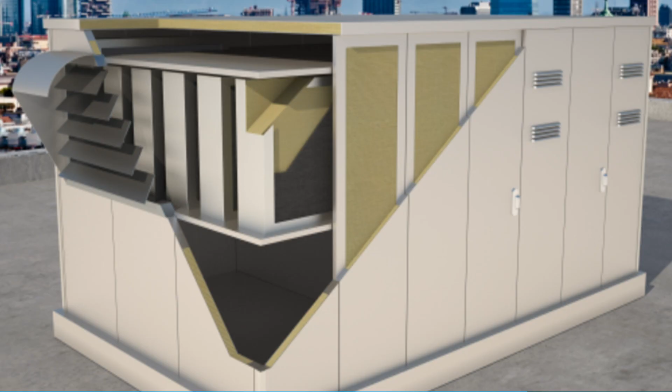However, when we can't avoid certain impact to the environment, we have to think about acoustic solutions. This is a good illustration of what reducing the noise at the source actually means. Mineral wool is very often used to fabricate casings and enclosures for equipment. It's often used as acoustic infill for sound attenuators, or used inside acoustic louvers, which enable the circulation of air but still reduce the noise level we emit into the environment.

And all this noise reduction happens exactly because of the high sound absorption that mineral wool provides. Because as we force the air and the sound to go through a certain space which is padded, which is lined with mineral wool, sound tends to get reduced.

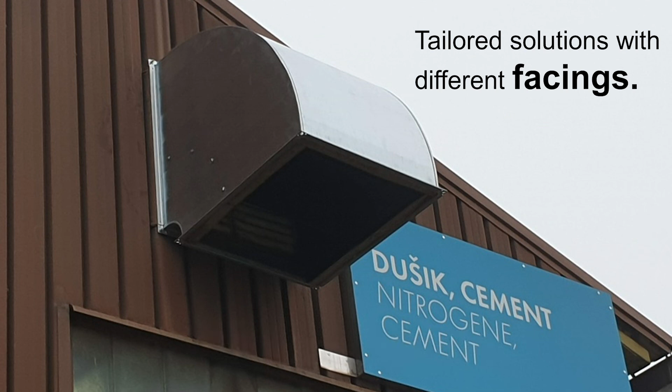Here is one such solution implemented at our own factory in Slovenia, where a relatively simple elbow padded with mineral wool insulation prevented noise from being transmitted from the fan, located behind this elbow, to the neighbors. Our insulation can be easily shaped to fit any custom solution, and that's why it is so useful for such tailored applications.

On this particular example, you can notice that the finishing of the insulating layer is black - that's because of the facing applied to the insulation. This particular facing has been applied to prevent migration of fibers due to the airflow. So it's often the case that apart from noise pollution, we need to consider health or hygienic requirements too.

What's important to capture from this story about noise impact to the environment is that the most effective strategy of mitigating noise is to reduce it at the source itself. For these particular purposes, typical acoustic measures include acoustic barriers, acoustic enclosures, blankets, or more complicated devices like sound attenuators or acoustic louvers.

And from the design and coordination point of view, locating the noisy equipment as far as possible from noise-sensitive areas is always a good choice. And in all these applications, it's again mineral wool that aids in reducing the noise levels emitted into the environment.

For this particular application, we at Knauf Insulation have a dedicated range of products for technical solutions - our Thermo-teK and Power-teK insulations, which are generally very easy to shape, so installation is very easy. Usually these applications happen in very constrained spaces, so it's also possible to fabricate all these products with a variety of facings suitable for every particular application.